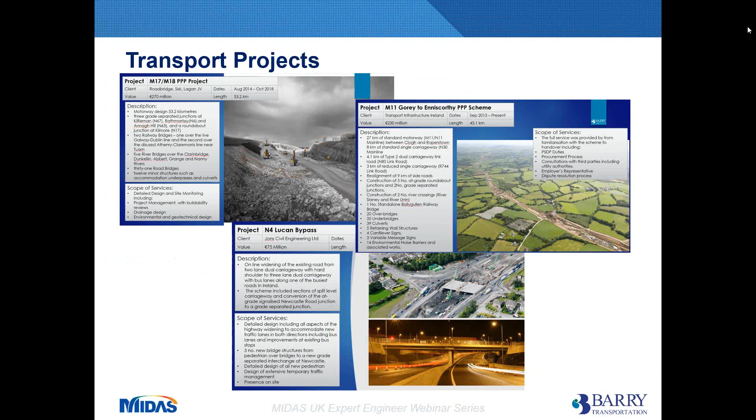A little bit about myself. I have over 15 years experience in structural bridge design. I'm a chartered engineer, and I specialize in concrete bridges, but over the course of my career I also worked on a number of steel and composite structures. I started my career in the Czech Republic, where I worked on a few motorway schemes, also in Slovakia. After moving to Ireland, I worked on a number of infrastructure projects here in Ireland and also in the UK.

Now let's have a look at what makes footbridge design different from a standard road or rail bridge, and what challenges the designer may have to face when designing a footbridge.

I would highlight key points related to footbridge design: aesthetics, structural robustness, and the need to pay attention to stability and vibration. These are by no means unique to footbridges, but with footbridge design we may encounter these specific points more often, and they tend to play a bigger role in practically every footbridge we may design.

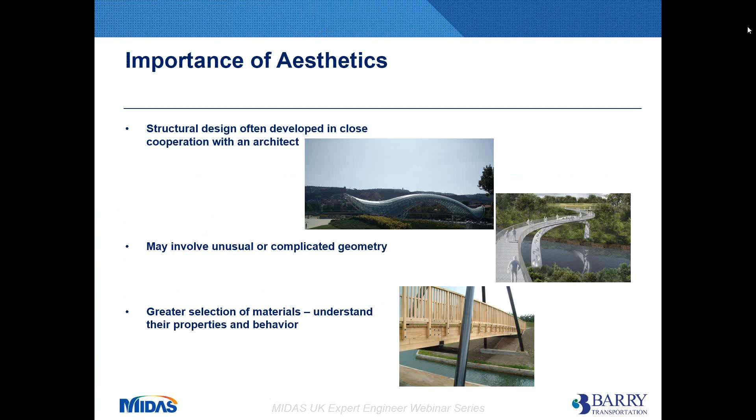Footbridge design also allows for a greater selection of materials, so as designers we need to understand the properties and behavior of these materials, even those we do not normally use for road or rail bridges, like timber, aluminium, glass, and so on.

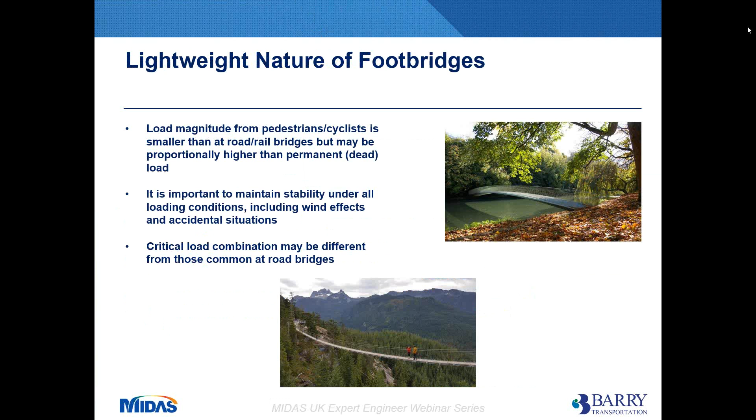In terms of structural robustness, when we design footbridges we want them to be lightweight. Quite often footbridges are very slender, airy structures, and at the same time we have to ensure they have sufficient stiffness and strength to maintain their stability. It may be an issue for wind effects, or the critical combinations for the design may be quite different from those we are used to when we design road bridges.

Related to stability is dynamic response and vibration. This is not usually an issue for the majority of short and medium span road bridges, but it is an important factor in footbridge design, because if the structure has a low natural frequency it may lead to unstable lateral response and, in the worst case, loss of stability. It may also lead to vibration, which can cause discomfort to users.

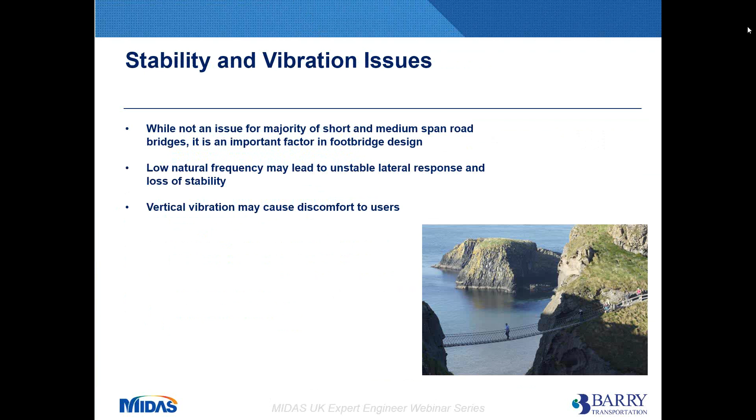Now we can have a look at some Eurocode requirements. Just a brief overview of guidance and principles in Eurocode, which are particularly applicable to footbridge design.

Footbridges are subjected to different types of live load. So Eurocode 1, traffic loads on bridges, also contains requirements for dynamic loading on footbridges. Also, accidental actions would be quite critical for footbridge design, as well as wind actions, and some of the clauses in the Eurocode dealing with wind actions cover footbridges.

The structural design is covered by Eurocode 2 to 6. The same limit state principles apply to footbridges, their global stability, member verification as any other structure. So there wouldn't be any difference in this group of Eurocodes for the structural design.

We can have a closer look at the loading, because that's what differentiates the footbridges most from road and rail bridges.

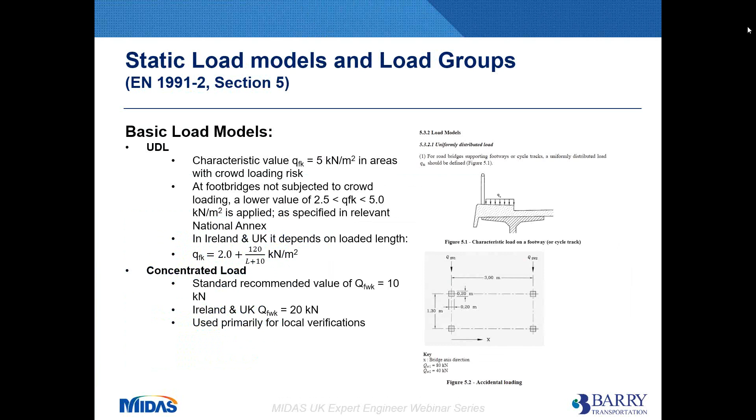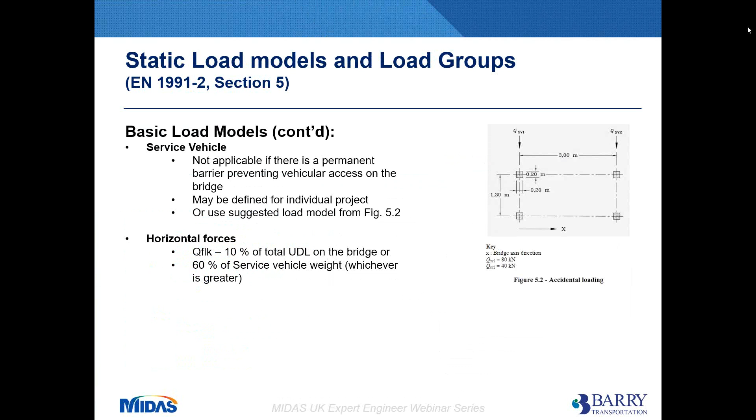The static loads and static load models are formed or made up from four elementary components: UDL distributed load, concentrated load, service vehicle, and horizontal forces. And these four components are combined into groups of loads.

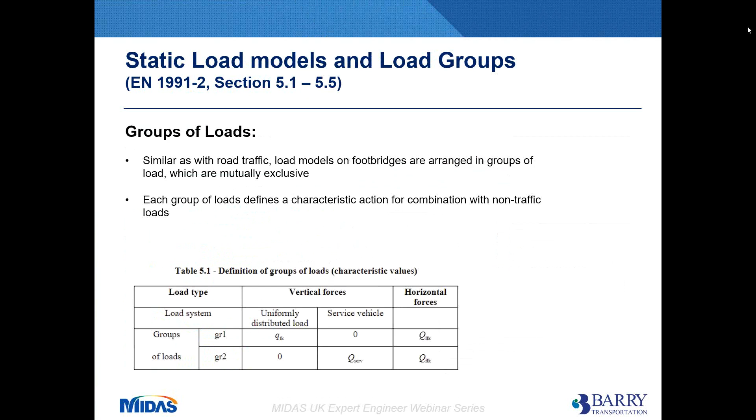It's a very similar concept as with road traffic. So on footbridges, we either combine UDL and horizontal forces, or service vehicle and horizontal forces, and this group of loads is treated as a single live load action for the purpose of combinations and factoring and so on.

The accidental loads are covered partially in the traffic loading code 1991-2, and partially in the accidental actions code 1991-1-7.

Since accidental loads can have fatal consequences for the structure and its users, and strengthening the footbridge to resist the full impact would be uneconomical, we take measures to avoid them.

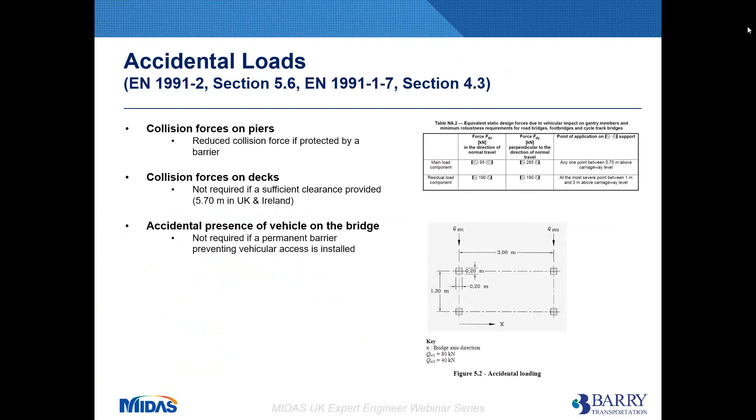Collision forces on piers of footbridges are reduced because the piers are usually protected by a barrier. For collision forces on decks, we can avoid application of this accidental load if we provide sufficient clearance, which is, in the UK and Ireland, 5.7 meters. And accidental presence of a vehicle on the bridge can again be avoided if a permanent barrier is installed which prevents access of vehicles on the bridge.

Now, what differentiates footbridges most from normal road bridges of short and medium span? That's the application of dynamic loads. There are two key points which we need to pay attention to.

It's the natural frequency of the structure, because if any of the natural frequencies are identical to frequencies of forces applied to the structure, which would be pedestrians, joggers or cyclists, there is a risk of resonance, which may lead to unacceptable vibration or even loss of stability. So natural frequencies is the first key point.

The second key point to pay attention to is vibration. Vibration from normal pedestrian traffic should not cause discomfort to users. That's why the code specifies a limit defined as an acceleration limit.

Dynamic effects of walking pedestrians can be represented by a periodic force, and this force will have a typical frequency between 1 and 3 Hertz. In the horizontal direction, the effects of walking pedestrians would have a frequency between 0.5 and 1.5 Hertz. And if there's a group of joggers crossing the bridge, that may induce forces with a frequency of about 3 Hertz.

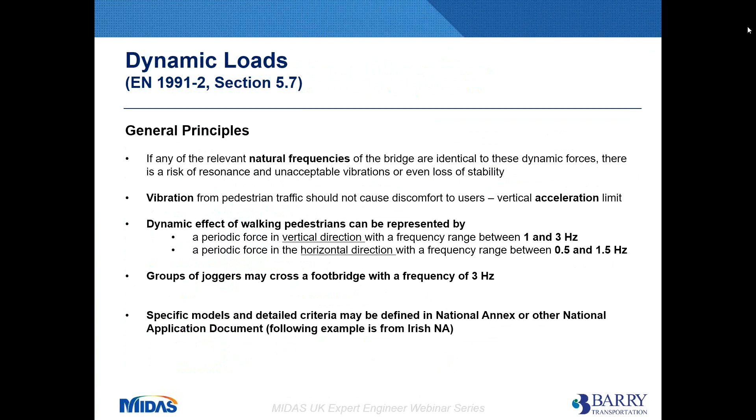So specific models and detailed criteria for how to fulfill this and how to achieve that the structure is stable are defined in the national annex or other national application document. And for the UK and Ireland, Eurocode 1...

...specifies the maximum vertical deck acceleration, which has a limiting serviceability value in the range between 0.5 and 2 meters per second squared. The exact limit value is calculated based on a formula in the code, and it depends on the site usage, route redundancy, and structure height.

Then the dynamic effects of pedestrians, or a group of pedestrians, are represented by the application of a vertical pulsating force which moves across the span of the bridge. Again, there's an exact formula in the code which helps us as designers calculate the magnitude of this load. It depends on the natural frequency and other factors.

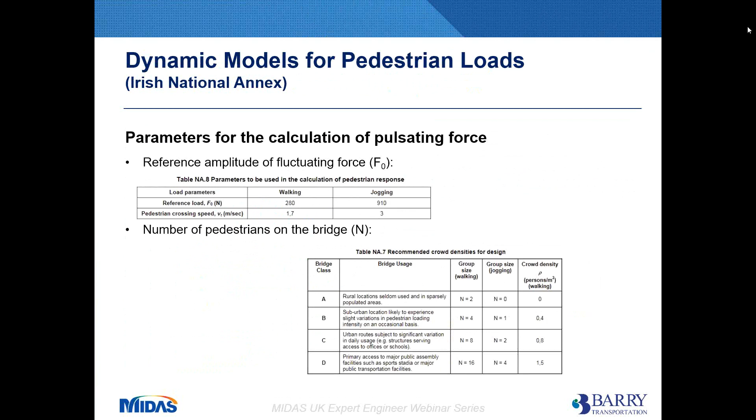The footbridges, for the purpose of dynamic loading, are split into four classes depending on location and usage. Then the dynamic loading or dynamic force is applied, with different values applied depending on the bridge class. Also, we should know that the pedestrian crossing speed, how fast they walk, is also defined, which helps us define the duration of dynamic loading.

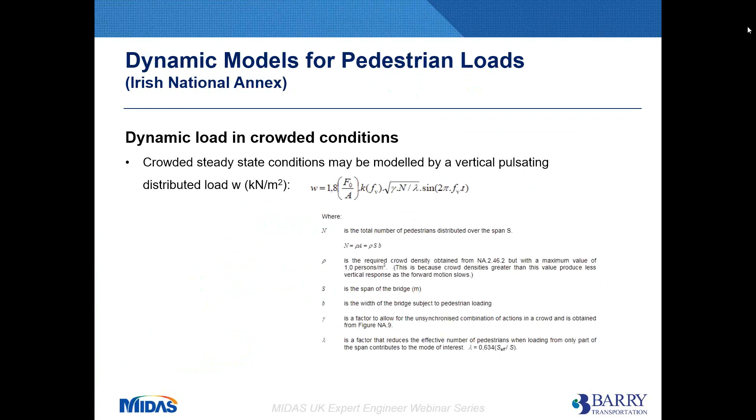The other aspect of dynamic loading would be loading crowded conditions. If the bridge is located in the city center or close to a stadium, it may get into a crowded state. Instead of using a single point force pulsating and moving across the bridge, the dynamic loading is modeled by a vertical pulsating distributed load, so the load over area on the bridge. That helps us to assess the possible vibration issues.

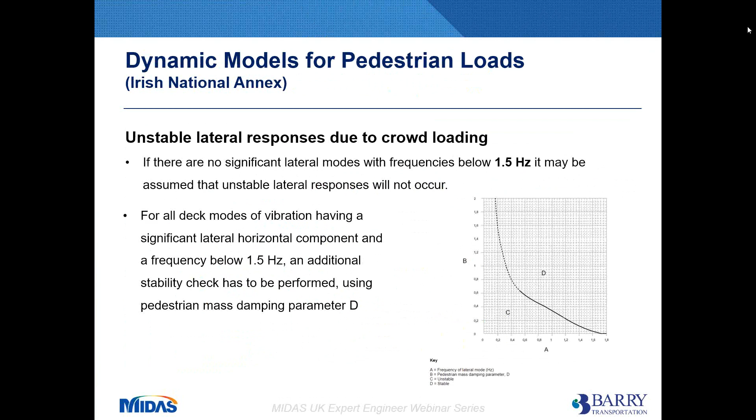The other requirement regarding natural frequencies is specified in the code: if there are no significant lateral modes with frequencies below 1.5 Hertz, we may assume that the structure is stable and there's no risk of lateral instability. If any of the critical frequencies is lower than 1.5 Hertz, then there are additional checks to perform, or we may need to redesign the structure or introduce some damping devices.

Apart from pedestrian or generally traffic loading, in certain situations we may need to investigate the dynamic effects of wind loading, and the Eurocode dealing with wind loading also provides general guidance. It says that dynamic magnification effects due to vertical response can be ignored if fundamental frequencies in bending and torsion are greater than 1 Hertz.

Or we may need to fulfill an alternative condition. But taking into account that generally we want to avoid frequencies below 1.5 or even 3 Hertz, it means that for most bridges where we fulfill the condition for the pedestrian dynamic load, we are also fulfilling the condition for the wind loading. But for long span or special structures, this is something which needs to be taken into account.

So this was a brief overview of Eurocode requirements applicable to footbridge design, especially in relation to dynamic effects, which are the main point for footbridge design.

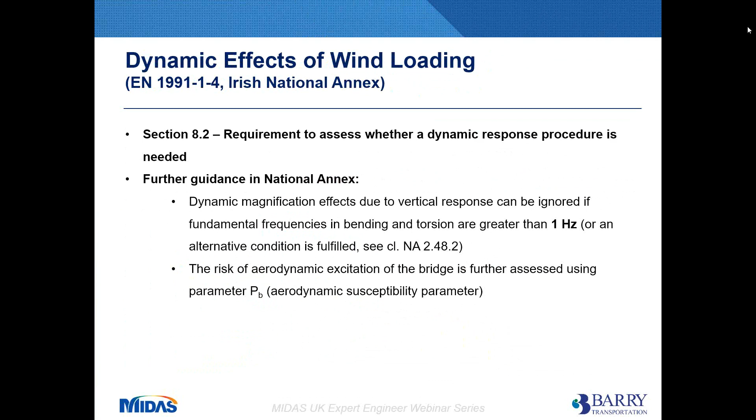Now we discuss how these requirements were applied on a Warren Truss footbridge. This structure has a span of 50 meters, a clear internal width of 3 meters. The maximum structural depth at midspan was 4.2 meters, and both top and bottom chords of the truss are curved.

In a gentle radius to improve the appearance. Although in this particular case, aesthetics wasn't a governing factor for the design because the bridge is in a rural location with low flow of pedestrians.

The design of this footbridge was actually developed as a result of a value engineering exercise or proposal, because the original structure was a 2-span beam and slab, and we proposed a single-span structure to avoid placing the support in the central median of the motorway, and the truss works well for this arrangement.

So in the second part of our webinar, we can focus on how this particular structure, or generally a truss, can be generated in Midas, how we can generate a model in relation to what we discussed in the Eurocode requirements for dynamic response and natural frequencies. We will look into stability and dynamic response, and again how this can be performed in Midas. Then global static analysis, member verification, and generation of the design report.

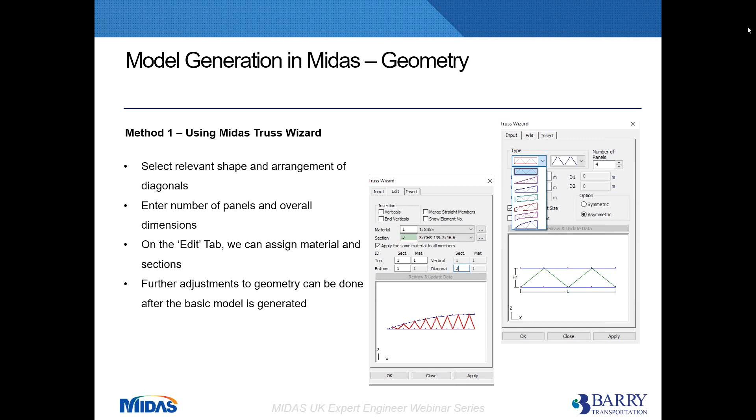We can select a specific or the closest similar shape of truss, enter a number of panels, overall dimensions. We can edit nodes or even assign material and sections, and then do the final adjustments when the geometry is generated. This wizard will generate a 2D truss for the structure, like the Warren Truss footbridge. In our case, this would have to be copied and assembled for a full 3D model.

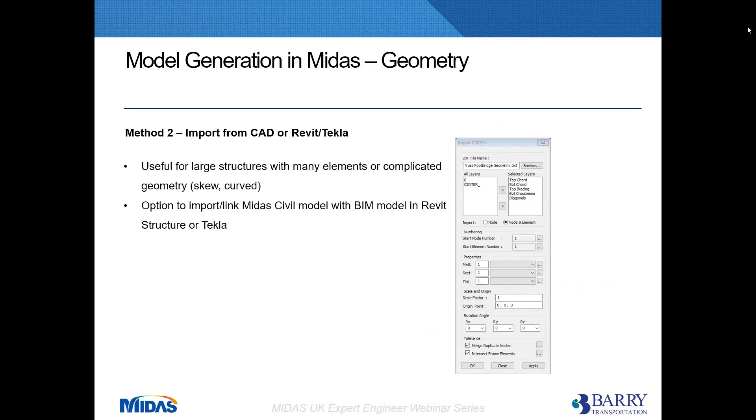The second method, which is especially useful for larger structures with many elements, or for complicated geometry when we have a skew arrangement or curved structure, is that we can import a CAD file directly, or there's even an option to import or link a Midas Civil model with a BIM model in Revit Structure or Tekla. That's done with the help of an add-on installed in Revit or Tekla, which allows the exchange of information between the two pieces of software.

The structure properties are standard for any structure. In this particular case, the steel truss is of S355 steel. It's made from circular hollow sections for the main truss. The rectangular hollow sections form the deck cross beams only.

The structure is articulated and sits on elastomeric bearings. The stiffness of the bearing, calculated based on the properties of the elastomers, can be included in the model.

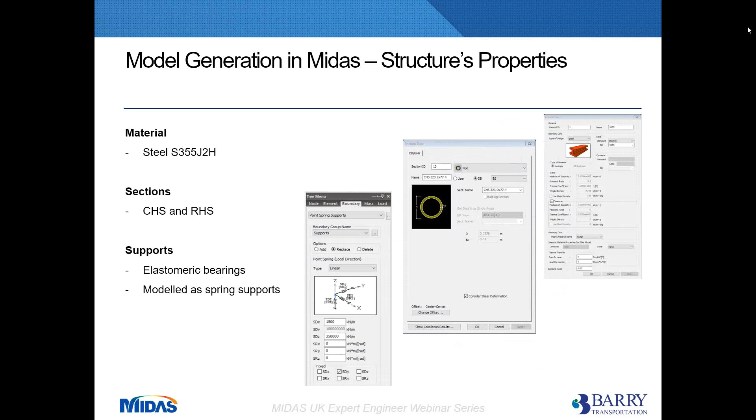There are some additional properties and settings specifically related to enabling us to perform dynamic analysis. One of them is the need to create an element on which we can apply the dynamic pulsating force. In my case, I created a dummy beam on the bridge center line on which the pulsating force is applied.

The other important point for dynamic and modal analysis is setting conversion of self-weight into masses. That's a tick in the structure type setting, convert self-weight into masses. If we want to convert other types of loads, like superimposed dead load, into masses, that's done in the load menu using the load to masses dialog.

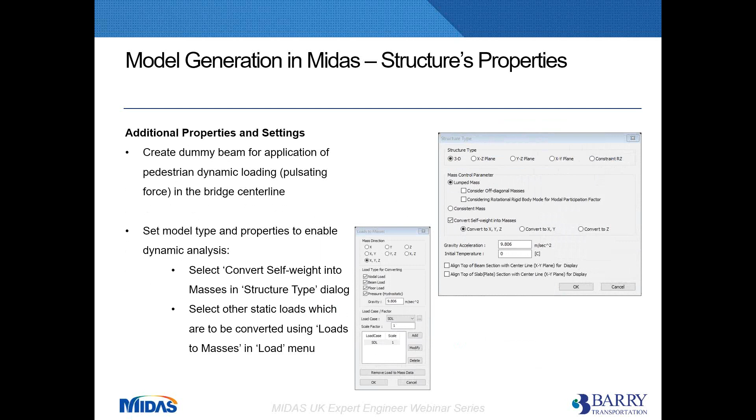The other properties and build-up of the model would be very similar to any other structure. So we define all the load cases and combinations and can analyze the structure.

We can now focus on how we verify or analyze the stability and dynamic response of the structure. I mentioned before that it has two key parts. First is the natural frequency, which in Midas is called eigenvalue analysis. The other key part is the dynamic response, so application of dynamic load.

To investigate the natural frequencies of the structure, we turn on the eigenvalue analysis control in the analysis menu in Midas, and we do it by selecting the number of frequencies we want to analyze. In this particular case, I selected 7. We may go for 10 or even more, because some of the higher frequencies may still be realistic and applicable to the structure.

Then we need to analyze different modes of vibration, because natural frequency is basically the frequency at which the structure vibrates naturally. In different directions—longitudinal, transverse, vertical, or twisting—the structure would vibrate at different frequencies. We need to prove that the modes of vibration are not close to the critical values of vibration induced by pedestrians, which is generally the range between 1 and 3 Hertz.

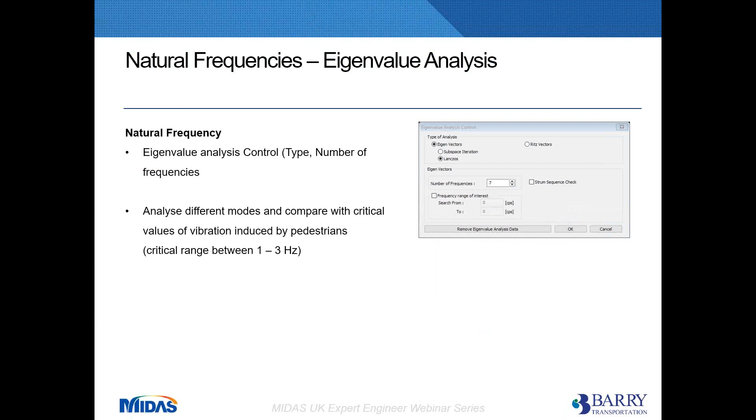The output from the eigenvalue analysis can be either numerical, like in this example. So for each mode, we can see the actual frequency. Mode 1 has a frequency of 1.68, which is actually close to 1.5 Hertz.

But at the same time, when we check what's the shape or what's the mode of that vibration, we notice that it is vibrating in the longitudinal axis of the bridge, so it wouldn't be critical.

The second mode has a frequency of 2.53 Hertz, and from the table below we can see that it's vibrating in the y direction, so it is a lateral transverse vibration. The third mode is over 3 Hertz, 3.47, which is in the vertical direction, so an actual vertical vibration.

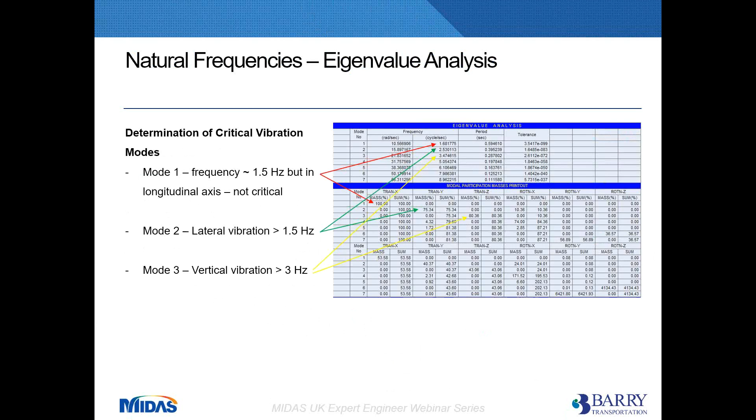So this provides an overview, but we can also check the actual graphic results or see the exact shape of vibration. On the following short video, you can see how it can be done in Midas.

So we go to results, select mode shapes, vibration mode shapes, and then select the relevant mode. We want to display the legend, and when we hit apply, it will display the shape of the structure in this particular mode. Also in the legend, we can check the actual frequency and the direction in which the structure vibrates.

Here we can see that it's in the longitudinal direction. For the second mode, we can see that the deflected shape has changed, as did the frequency. It's exactly the same as in the table shown before.

And if we turn on animation and click recording, it will actually show us the shape or the vibration in animation, so we can get a better idea how this mode of natural frequency works. It's similar for the third mode, which is in the vertical direction—the classic up and down vibration.

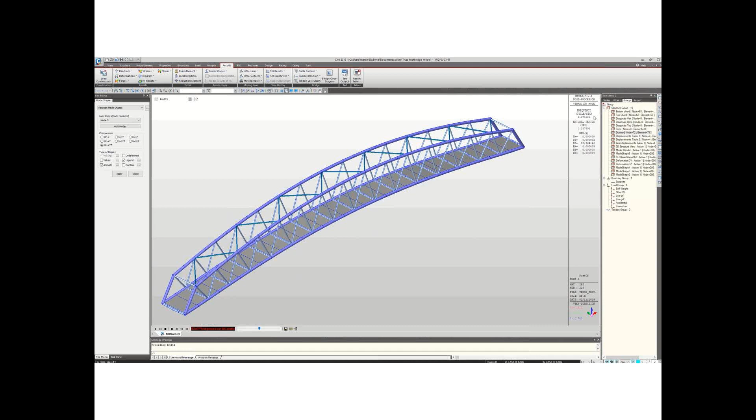So that was the first verification, natural frequencies. For the assessment of dynamic response, we want to prove that the vertical deck acceleration is within the limits set in the code, so that any vibration is not causing any discomfort to the users.

How is it applied? Well, we said that the dynamic load is applied by the pulsating or fluctuating force. This in Midas is done the way that the value of the force is calculated in time increments. So we create a set of force values in different defined time, and then the force is applied on a series of nodes along the bridge span.

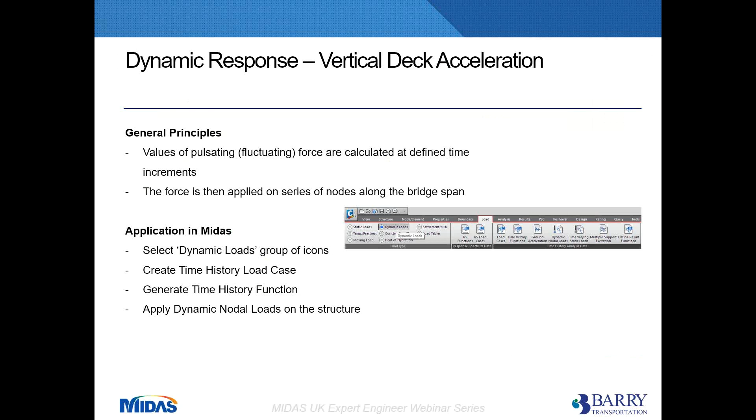The procedure, how to apply the dynamic load in Midas, is quite not really self-explanatory, but relatively understandable, because in the load menu we have dynamic load type and then a series of icons. So basically we follow those icons to create a time history load case, to generate a time history function, and then to apply dynamic nodal loads on the structure if we deal with the node load and not with the crowd condition.

So we know the length of the bridge, 50 meters, so it takes about 30 seconds for the pedestrian to cross the bridge. Then we also specify the damping ratio, and in the time history function, we calculate the value of the fluctuating force for time increments. In this particular case, the time increments were 100th of a second, and the series of values can be calculated, for example, in Excel, and then copied into Midas, which creates this fluctuating force of sine profile.

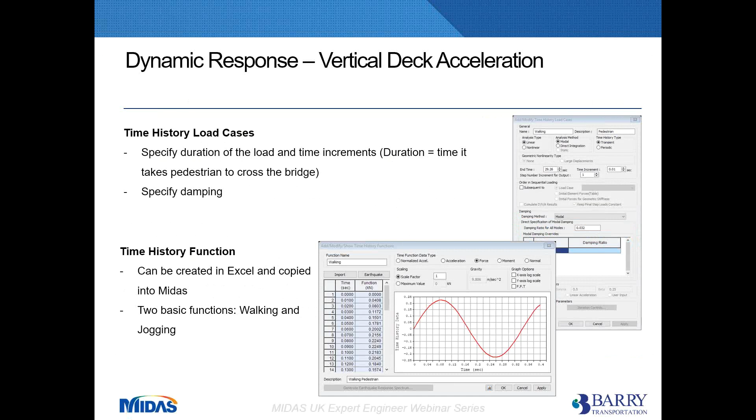For the Warren Truss bridge, we applied only the walking function, because it's in a rural condition and there wasn't a requirement for joggers. If we have a structure in an urban environment, or there's a specific requirement, we may need to create two separate functions for walking and jogging, because they will be different.

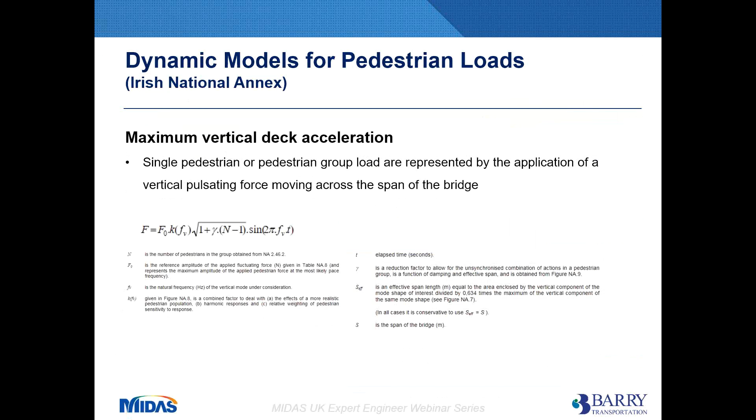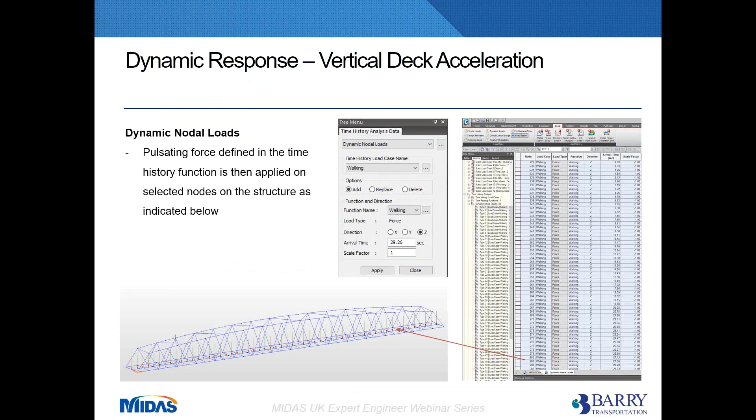So this is just a copy from the previous slide of the pulsating force. This pulsating force actually forms the time history function in Midas. And then this pulsating force, as defined in the time history function, is applied on selected nodes on the structure, as we can see on the screenshots below.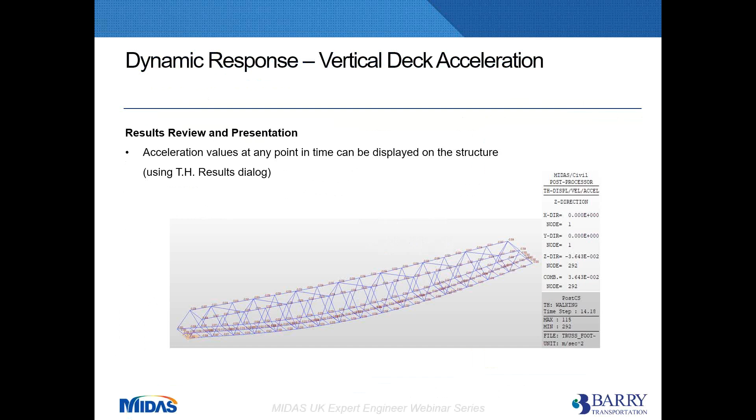We analyze it, and we can review the acceleration, forces, or displacement at any point in graphical form or even in numerical form. The problem is, if our time increments are hundredths of a second, it's a lot of values, a lot of numbers to review. So it's not very practical to look at it this way. But there's a function in Midas where we can create an envelope of results for any selected point on the structure, and this will create a graph showing the acceleration envelope.

It's in the time history graph function. So this is actually a plot from our Warren Truss footbridge. We can see that the peak acceleration was only 0.036 meters per second squared, which is much smaller than the limiting value in the code, even up to 0.5.

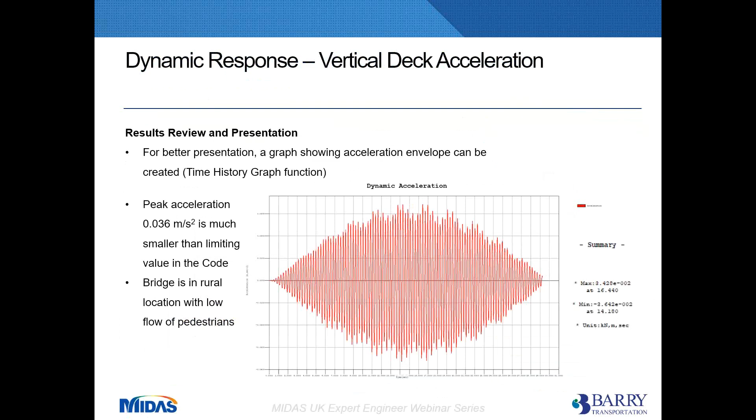And it is because of the low pedestrian loading, because it's in the rural condition, it's category A. So it is not expected to have more than 1 or 2 people on the bridge at the same time. But we can also see that the peak accelerations are close to the middle of the time period. It actually says that the maximum acceleration would be at time 16 seconds, the minimum at 14 seconds. And it makes sense because that's when the pedestrian is right in the middle of the bridge, so it has the greatest effect on the vibration.

Again, in the following short demonstration, we can see how to create this time history graph. So we go to results, time history graph, and we define the function we want to create the graph for.

So we are interested in acceleration. So add new function, create a name for it: acceleration. We select a node for which we want to create a graph or envelope of results. The greatest movement is expected on a simply supported structure in the midspan, so we select a midspan node.

We want to get accelerations in the vertical direction, and we use it for the load case we created for the dynamic load case. We can even select which mode is critical for this; we will use mode number 3. So this will create a function for graphing.

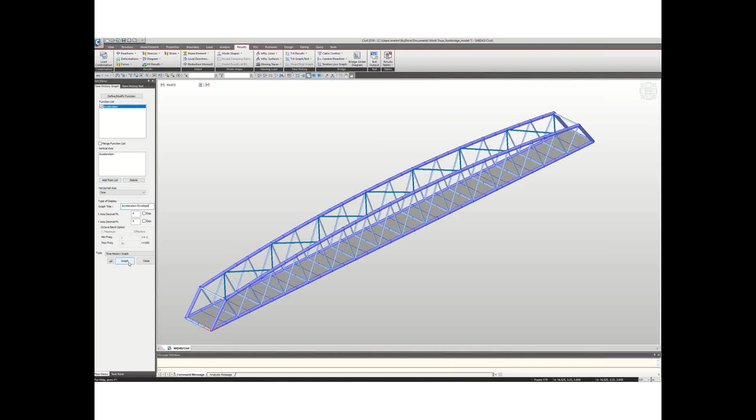So we are creating an acceleration envelope and then hit the graph, and the graph is created. If we want to present the graph further, export it, or use it in the report, there's a button next to the graph, which is the dynamic report chart. It basically creates a reference of this graph, which we can use for the creation of the report.

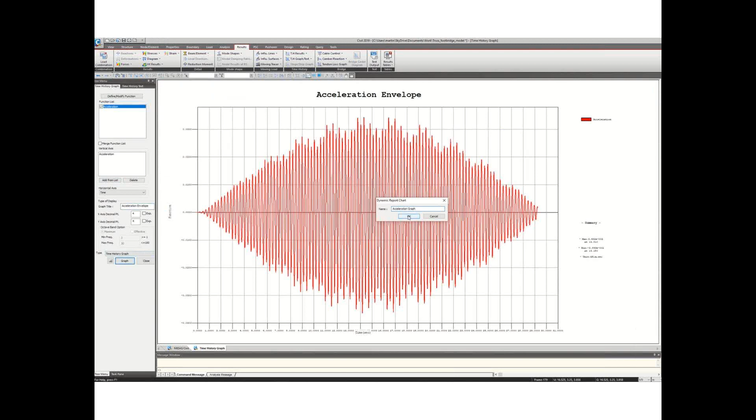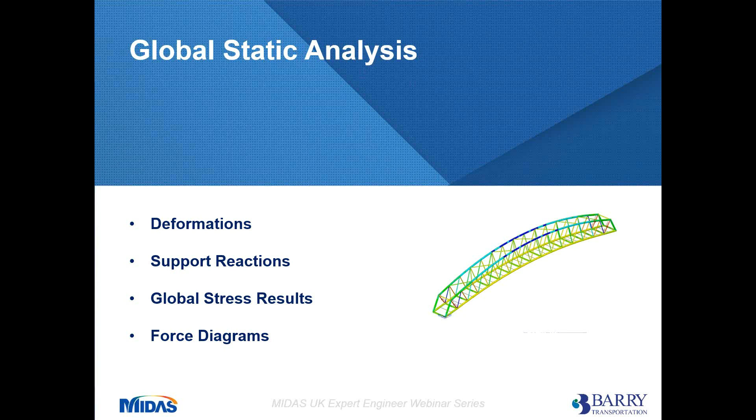So this was all related to dynamic analysis, investigation of natural frequencies, and vibration of the structure. The global static analysis is performed the same way as any other structure. We generally look at 4 main types of results, which are deformations, reactions, stress results, and force diagrams.

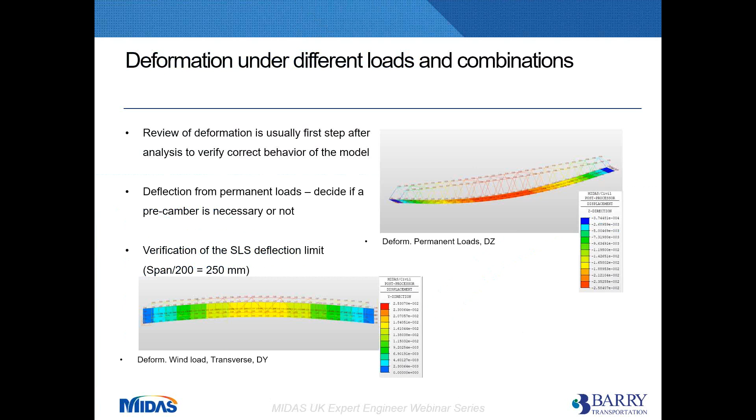Deformation, we tend to take for granted that it's so easy to get all these results from the software, but it's good and prudent to review the deformation as a first step after the analysis, just to verify that the model behaves correctly, that the deformations are realistic. It can also help us to see if there's a need, particularly for steel structures, to introduce any precamber to compensate for the sagging from the permanent load. And we also verify that the deflection of the structure is within the limit given in the code.

Similarly, the support reactions, we generally want to use them for the bearing design, to create a bearing schedule and pass them to the bearing designer. But as a first step, we should review the model results and compare them with hand calculations, to have an idea what magnitude of reactions we should expect for permanent loads and live loads.

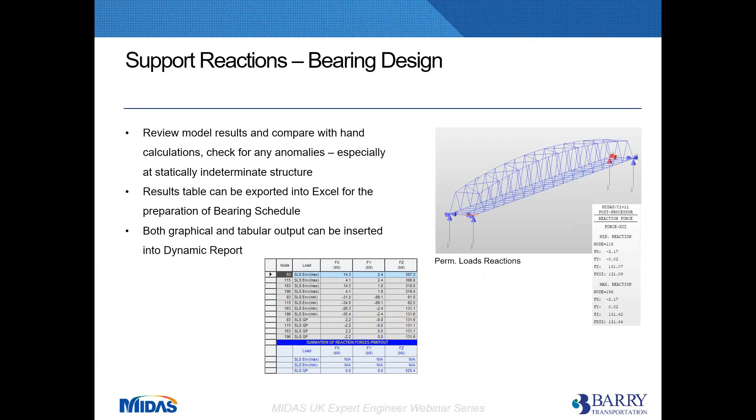And especially with statically indeterminate structures, we may check for any anomalies, any high reactions, any particular direction or moments, and so on. Both graphical and tabular output, as presented on this slide, can be inserted into the dynamic report.

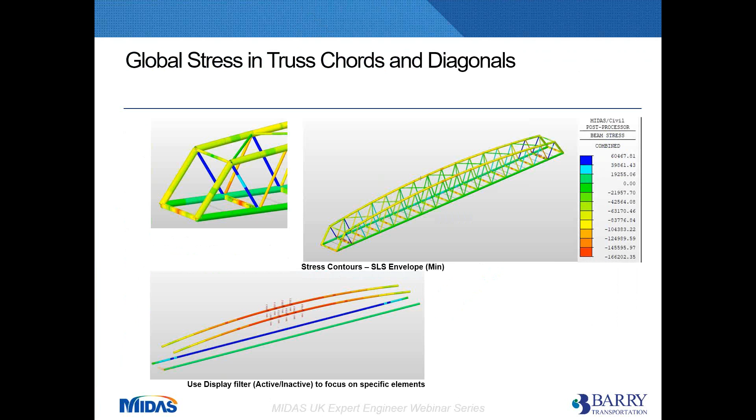For a steel truss like this one, an initial member sizing is based on the global stress in main chords and the most stressed diagonals, which are near supports. So again, this is something to help us with the initial design, and review of the bending moment diagram.

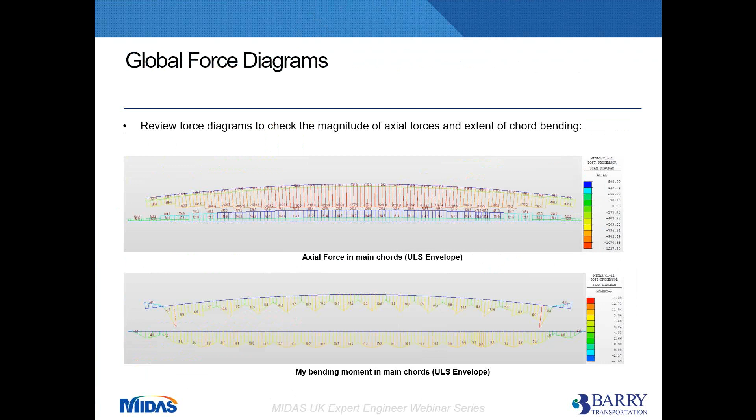It may not seem important for a truss where we expect mostly axial forces, but if the structure is modeled like this particular one as a frame instead of using truss, tension, compression only members, then we need to verify that there are no higher or high bending moments in connections, which would affect the member verification.

The member verification is the final set of checks, and it is usually the most time consuming because there's a number of hand calculations we need to perform. They are highly repetitive. For each critical member, we need to perform the same set of calculations.

Quite often in the office, we have in-house prepared design spreadsheets which save time, but we still need to identify which members are critical. We need to transfer the results from the model and put them into the spreadsheet. So it's quite useful that Midas has a set of member design features which simplify this task.

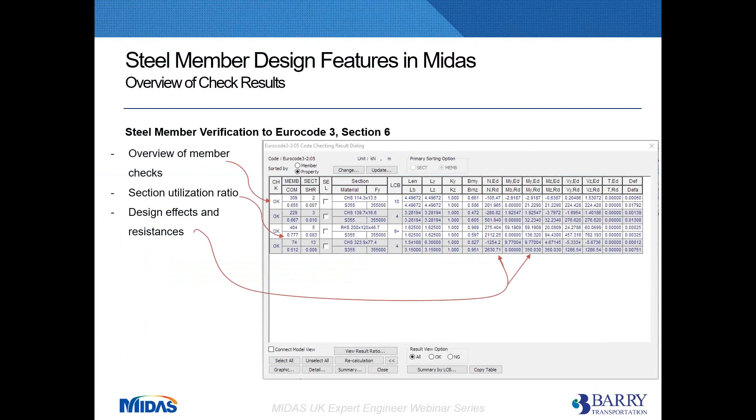The member design or member verification in Midas has 3 layers or 3 levels. The first layer is the overview of member checks. So in the design menu, in steel, we have a code check option, and this table provides a very clear overview of whether all elements are passing the check, what's the sectional utilization, and also the design effects, the forces which were taken into account, and the resistances. So this is the first layer.

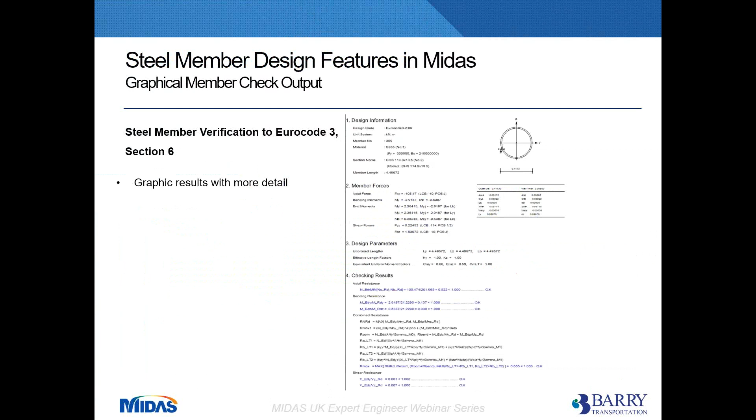The second layer, if we select a specific member from the table, we can display graphic results, which provide more details, some design parameters, checking results. And again, we can export this or print it out.

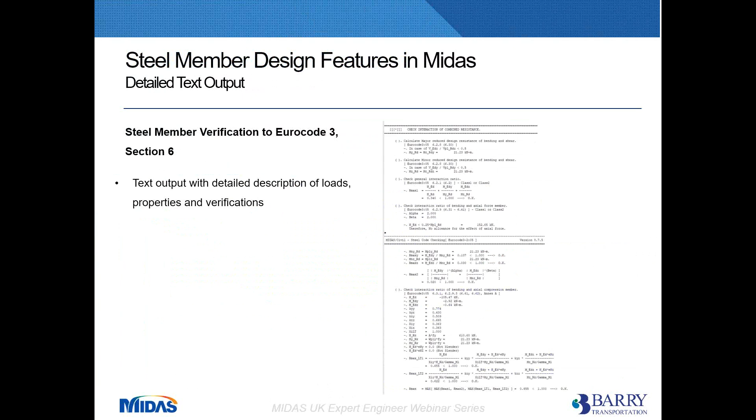And the third layer is the text output. Again, we can select a specific member and get text output with a detailed description of loads, properties, and verifications, which is typically several pages of text, but very detailed and closely following the structure as required in the Eurocode. So this helps to simplify the member verification, taking into account the imperfections and so on.

Then the last part of this webinar, I will talk just a few minutes about dynamic report generation. We need to record our design process as designers for archiving. We may need to provide the information to the design checker. If we collaborate with other designers on other structures, we may have to pass the information on, and sometimes we want to present the results of our analysis and design. So for all these reasons, the dynamic report feature in Midas provides an effective

means how to prepare such a report. Dynamic report, the idea or how it works, is that we create model references which we want to include in the report. So it may be graphics, images, or screenshots of stresses, reactions, bending moments, and so on. We can also select some tables and charts, like the acceleration chart we have shown before.

Then we start the dynamic report generator and insert those references into the report. We may add our own notes or additional information, save it, and if anything in the model changes in the future, we need to update load values or update the structural arrangement, we can always open the existing report and update the information from the current model. So I have a short video here showing how this can be achieved in just a few minutes.

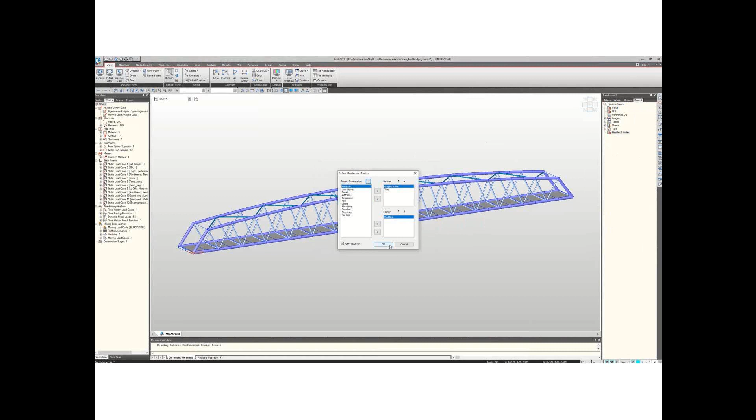So we go to the Report tab in the tree menu. We can select the basic formatting, font and sizes. We can select the information we want to include in the header and footer of the document. And then in the Tools menu, there's a dynamic report generator.

So when we create a new document, it opens basically a blank Word document within Midas. We can add the header and footer we prepared, and then add information from our model. So there are groups of information: images, tables, charts, and text. Some of them are predefined, prepared automatically, and some of them we need to select ourselves.

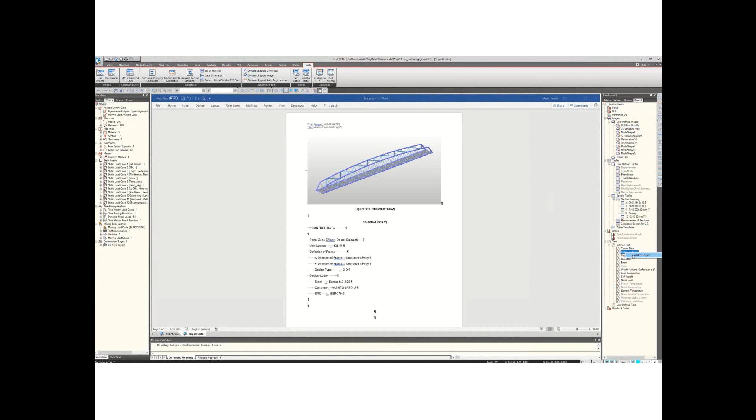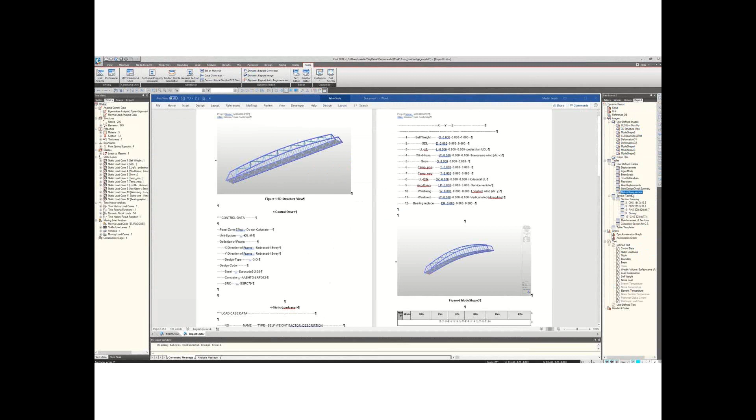So we can include the structural view of the model. We can insert the control data of our Midas model, or a list of our static load cases. When we analyze the natural frequencies, we may want to include some of the illustrations or figures of the critical frequencies and their shapes, as well as the table providing the information about all natural frequencies and their direction.

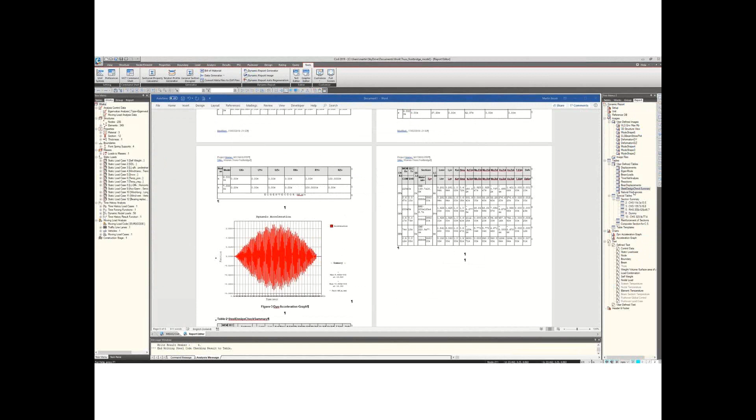We also covered the acceleration, so when we create an acceleration graph, it can be inserted into the dynamic report. And from the member verification, the table with the overview of member verification results, again, it can be inserted into the report, providing

the overview of the member checks. So then we can add our own information, explanation, or notes and save the report as we would do with any other Word document.

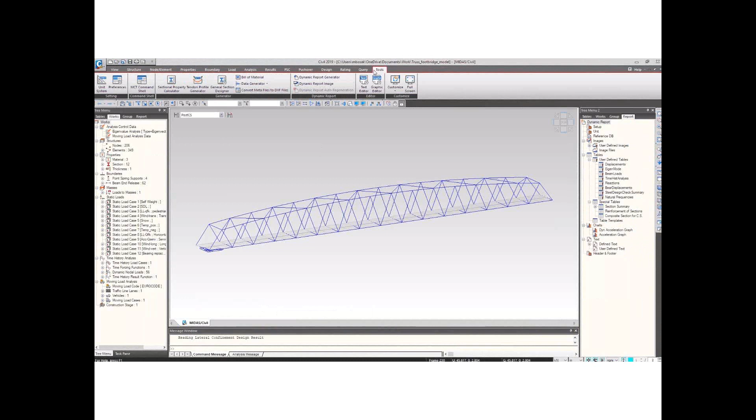If we want to update the report, again, we go to Tools, Dynamic Report Generator, and instead of creating a new document, we select Open Document. So we select the report we created before. The report opens.

And then another menu, Dynamic Report Auto Regeneration, is highlighted. So we can actually select information we already have in the report, like images, tables, or charts, and tick boxes for which of them we want to regenerate or update with the most current values from the model.

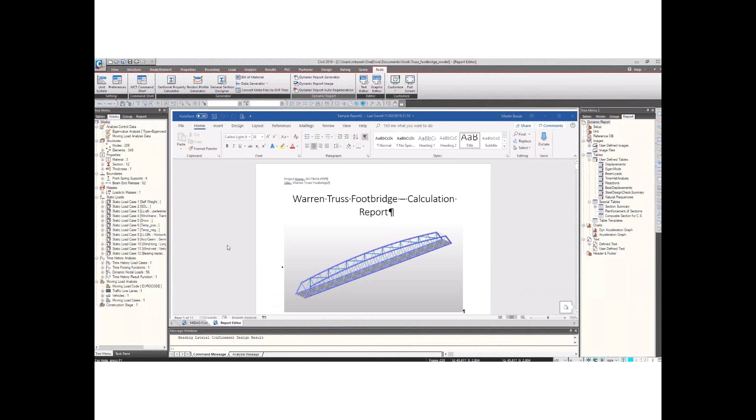So the benefits of dynamic report are obvious. They allow us to select various types of information from the model: views, diagrams, charts, tables, or even text. And because the report is linked with the model, we can make sure that it will always be up to date. The fact that it is generated in a separate Word document file also opens to us the possibility to add additional information and modify it, format it as we wish. And the report can be updated to reflect any model changes.

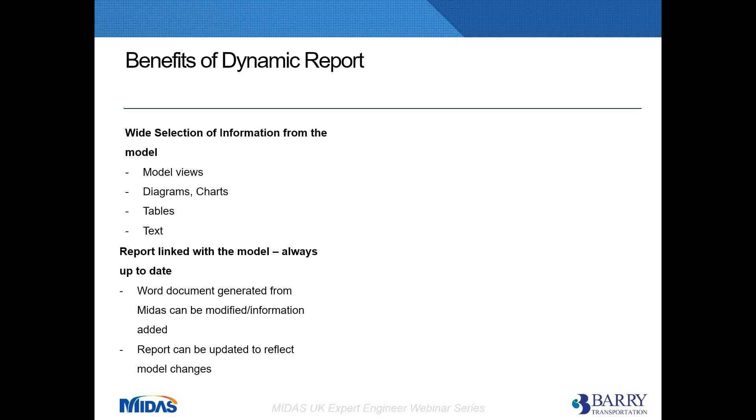So this brings us to the end of the webinar. I hope that you found it beneficial, that you learned something maybe from the dynamic analysis and the specific points related to footbridge design, or some of the tools available in Midas which can help us in the process of analysis and design of footbridges.